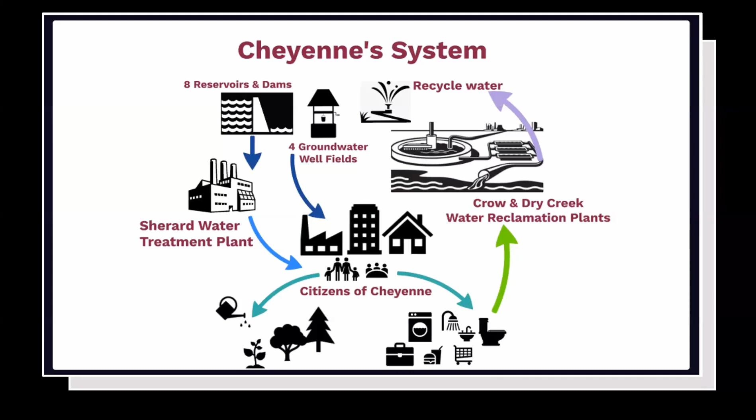Our goal is to grow that system more, and I'll get into that a little more, but that's just a quick overview of how our system works.

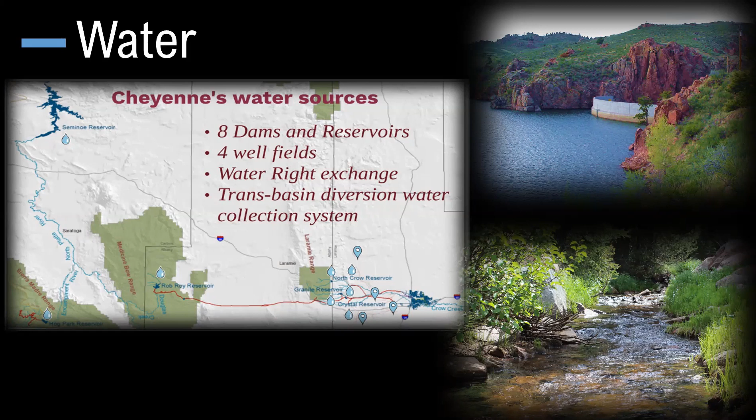Next slide, please. This starts out with our water. Like I said, we have 8 dams and reservoirs, 4 well fields, and water right exchange, and the video I'm going to show will explain all these, so I'm not going to go into detail. We have the only trans-basin diversion water collection system in the state of Wyoming. We actually bring water over from the western side of the divide as transfer water that enables us to collect that water in Rob Roy and bring it to Cheyenne. We have a video that we're going to show that'll explain that carefully.

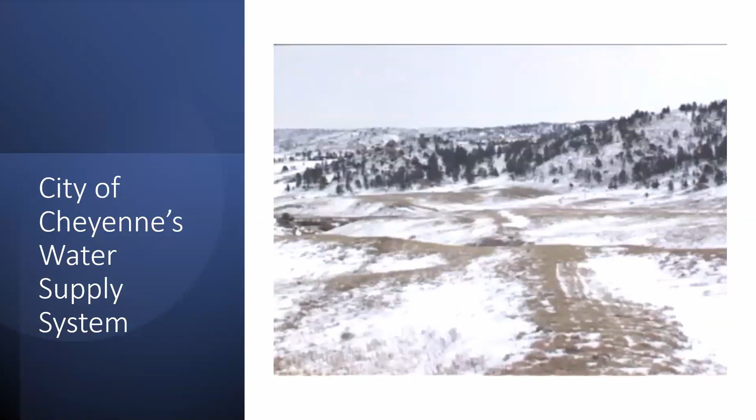The city of Cheyenne is home to more than 60,000 people. It is a city of commerce, full of life, art, education, and activities. When we look beyond our city borders, we see Cheyenne is located in a high-altitude prairie, an area sandwiched between the Rocky Mountains and the Great Plains. We have wind, rolling hills, prairie, and sun. But one thing you won't see a lot of is water. Cheyenne receives only about 15 inches of precipitation per year. So where does the water come from that keeps Cheyenne green and growing?

The City of Cheyenne Board of Public Utilities provides the community with water, and there are many stages the water goes through before it reaches homes and businesses. Our water system begins with snowfall, which is our main source of water. When the snow melts, spring runoff is guided through a series of collection systems, reservoirs, and wells located in southeastern Wyoming. Water is piped to Cheyenne from as far as 63 miles away.

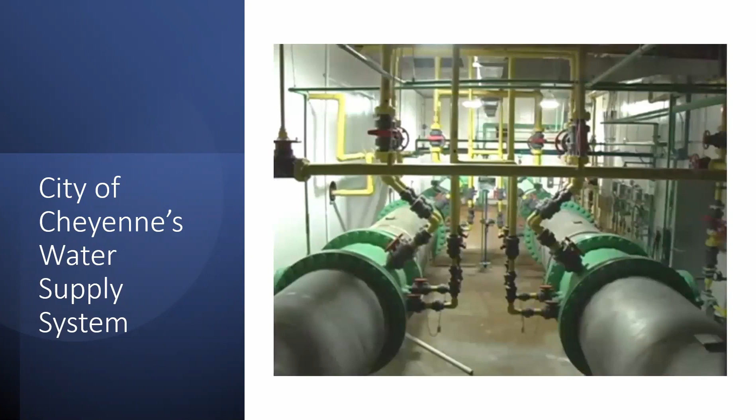Cheyenne's first water system began from buckets of water pulled from Crow Creek and over the years has grown into an elaborate collection and exchange system. In the winter of 1867, the Union Pacific Railroad camped along Crow Creek. Crow Creek provided water for the railroad crews and became the first water source for the city of Cheyenne. At this time, flow in Crow Creek was seasonal, with flooding in the spring and trickles of water in the fall. In order to provide a more consistent water source, the city of Cheyenne constructed small reservoirs and infiltration galleries. The remnants of one of these reservoirs can still be seen near the Botanic Gardens.

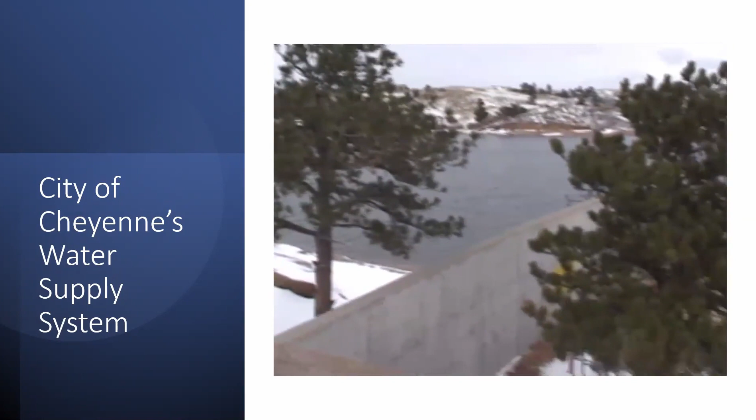One of Cheyenne's first reservoirs was constructed in 1904. The appropriately named Granite Springs Dam is a masonry arch constructed with granite blocks pulled from the surrounding area. The reservoir is still in use today and collects water from Middle Crow Creek. It can hold 5,320 acre-feet of water.

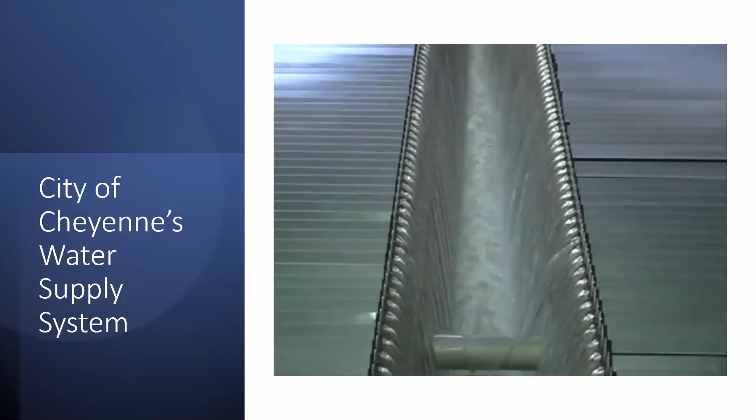Following the construction of Granite Springs Reservoir, the city of Cheyenne constructed Crystal Reservoir. Work began in 1909. Crystal Reservoir also collects water from Middle Crow Creek and can hold 3,400 acre-feet of water. Water from both Granite Springs and Crystal Reservoirs is piped to the Sherard Water Treatment Plant, where it is prepared for delivery to homes and businesses. Diversion structures on the creek water systems divert water released from the reservoirs to other locations so it can be piped onto Cheyenne.

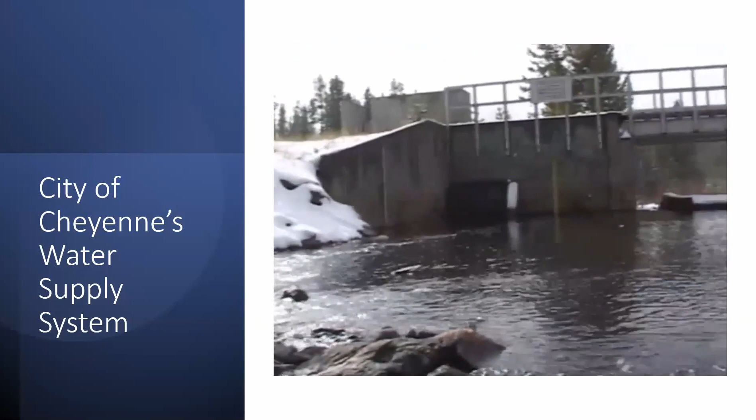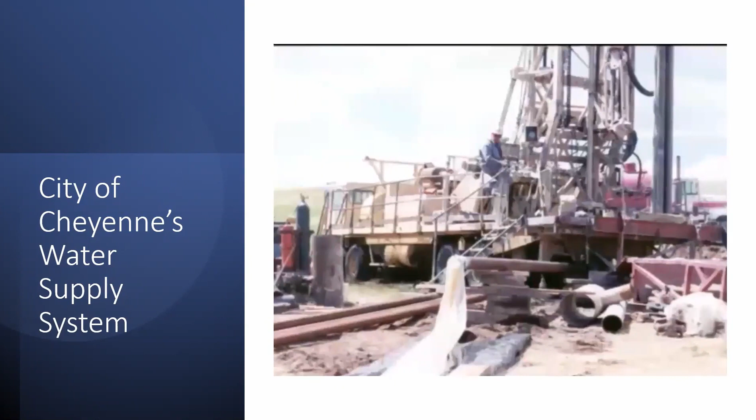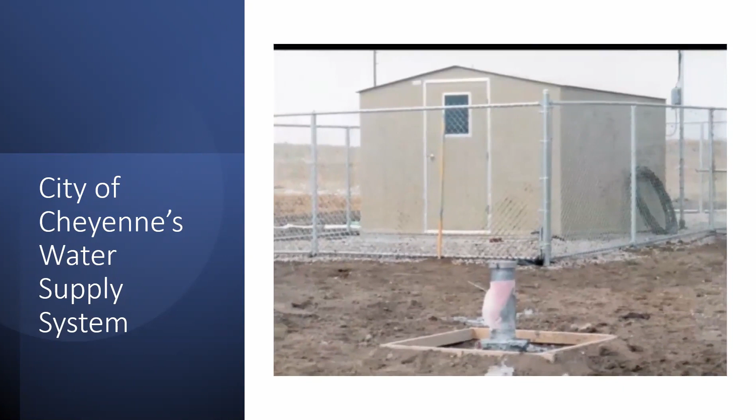Approximately 30% of the water used in Cheyenne comes from wells. The Board of Public Utilities maintains 4 well fields to the west and northwest of Cheyenne. These well fields consist of 35 active wells that go between 200 and 500 feet deep. They tap into the Ogallala and White River aquifers. Cheyenne has a right to 5,500 acre-feet of groundwater per year. The City of Cheyenne established the Board of Public Utilities to manage water resources on April 27, 1943.

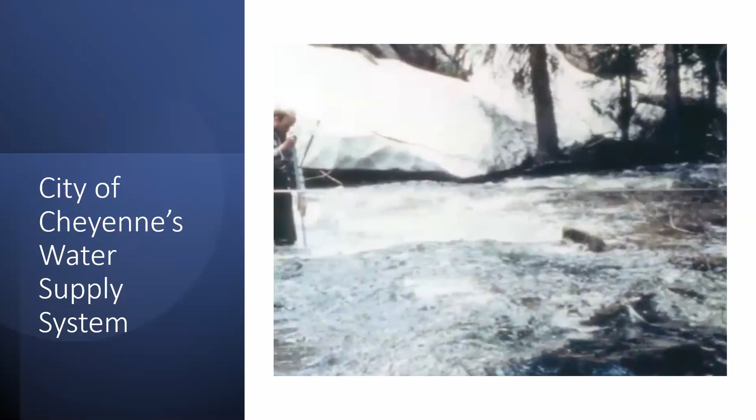Their mission is to develop, manage, operate, and maintain Cheyenne's water and wastewater resources prudently and professionally to provide the greatest benefit for the community's investment.

In the 1950s, Cheyenne's growth began to outpace the capabilities of local water resources. Since the North Platte River watershed was fully appropriated, meaning there wasn't any water available or unclaimed by other users, the Board of Public Utilities looked farther west for additional sources of water.

They found unappropriated water in the Little Snake River drainage, west of the Continental Divide in the Sierra Madre Mountains. The City of Cheyenne has the right to use this water. However, the presence of several mountain ranges make delivering the water to Cheyenne too costly. So how does Cheyenne benefit from this water when it is so far away?

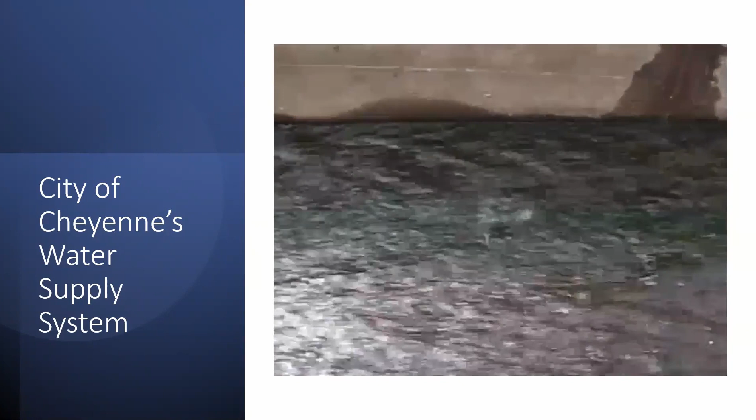Coordinating with the Wyoming State Engineer, an exchange arrangement was developed and approved whereby the Board of Public Utilities can take water from a closer, more deliverable source, Douglas Creek. To make the swap work, the Board of Public Utilities collects water from the western slope of the Sierra Madre Mountains and transports that water under the Continental Divide through a tunnel to Hog Park Reservoir.

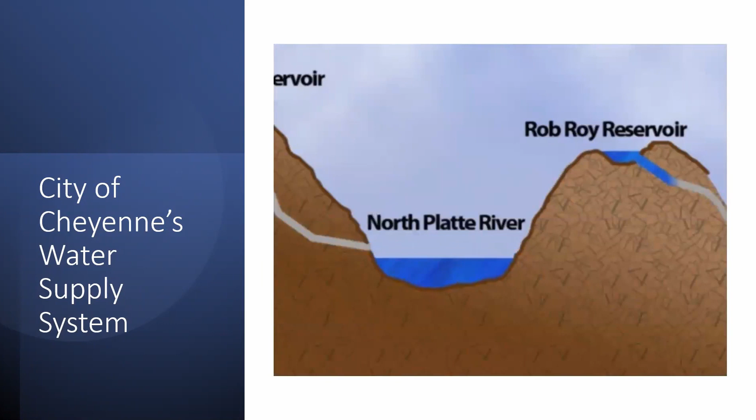Cheyenne uses the water stored in Hog Park Reservoir as trade water. When the Board of Public Utilities takes water out of the North Platte River system at Rob Roy Reservoir, they replace it with water from Hog Park Reservoir.

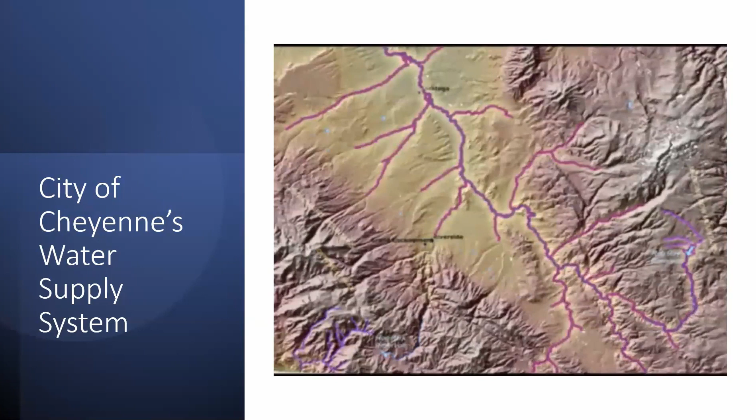Under ideal conditions, the Board of Public Utilities would take water out of the North Platte River system at Rob Roy Reservoir at exactly the same rate that it puts water into the North Platte River system from Hog Park Reservoir. This is seldom possible because the maximum amount of water that can flow down Hog Park Creek is limited for safety, erosion, and aquatic habitat reasons.

So during the spring runoff, the Board of Public Utilities is unable to release enough water from Hog Park to match the high flow rates in Douglas Creek. This limits the amount of water that Cheyenne can collect.

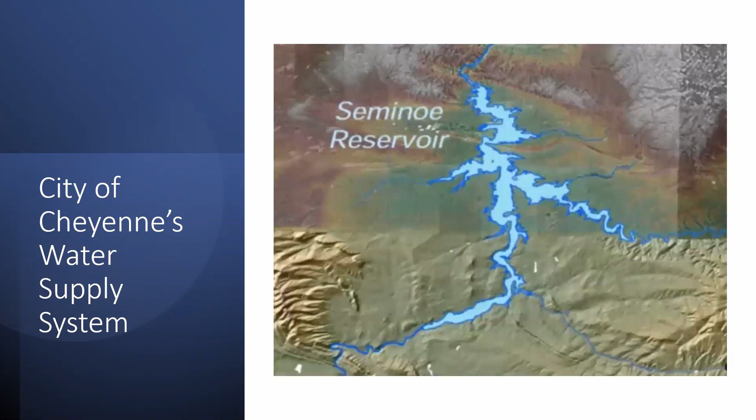To overcome this limitation, the Board of Public Utilities contracts with the Bureau of Reclamation to store water in Seminoe Reservoir throughout the year. During spring runoff, releases from Seminoe and Hog Park match the high flow rates in Douglas Creek.

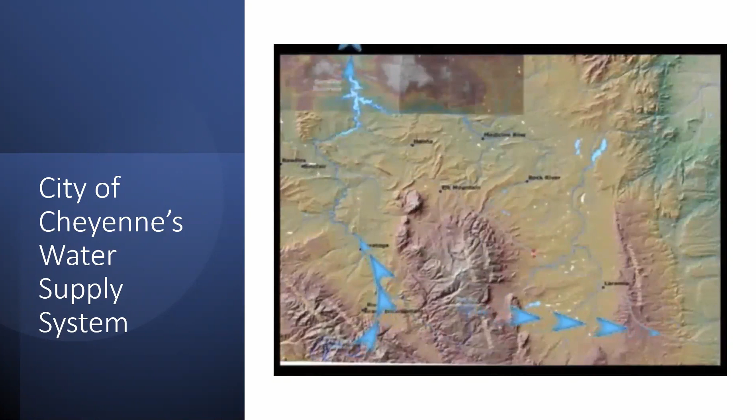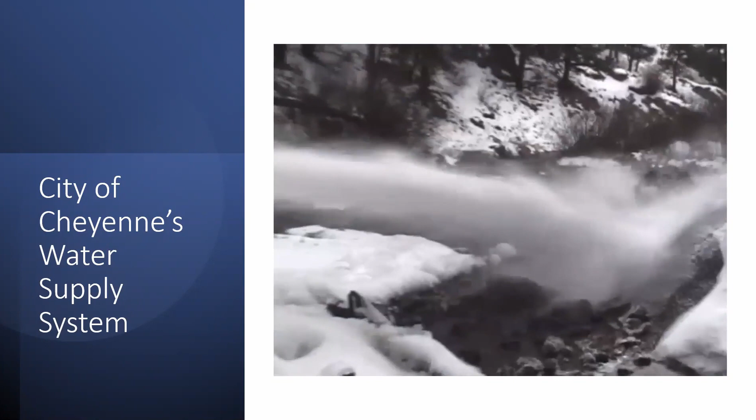The Little Snake Douglas Creek system relies on timed releases and the cooperation of several organizations. When runoff is available, the system yields approximately 17,500 acre-feet of water per year. This water is delivered via gravity-fed pipeline to Granite and Crystal reservoirs, and then on to Cheyenne.

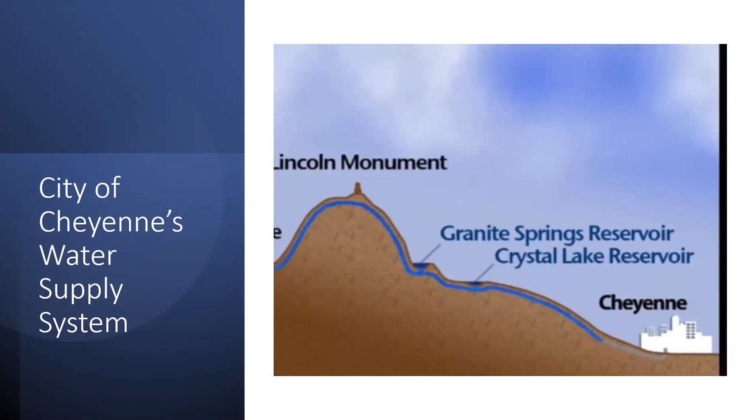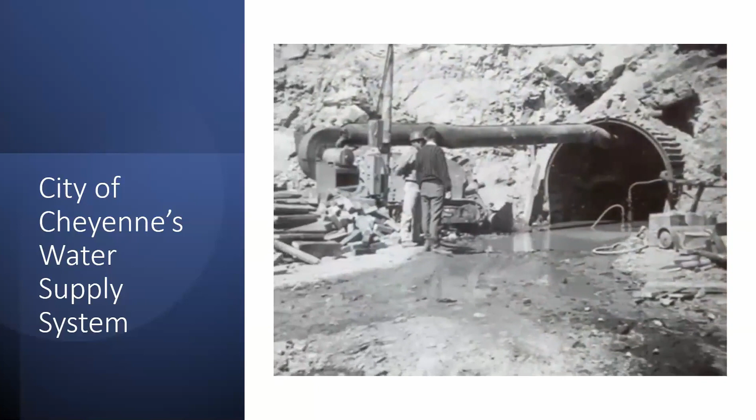Much of the Little Snake Douglas Creek system was constructed in 2 efforts, termed Stage 1 and Stage 2 projects. The Board of Public Utilities constructed the Stage 1 projects from 1962 through 1966. Stage 1 consisted of 5 miles of collection pipes and structures in the Little Snake Drainage, the Hog Park Tunnel, Hog Park Reservoir, Rob Roy Reservoir, Lake Owen, and 50 miles of 26-inch pipe.

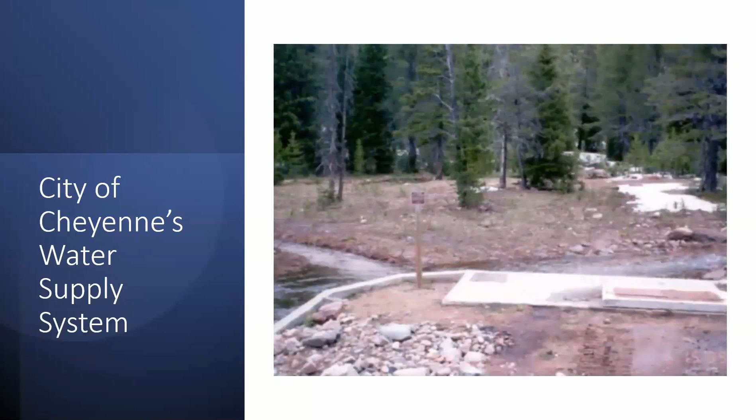Stage 2 was constructed during the 1980s and extended the Little Snake Drainage collection system by 12 miles, enlarged Hog Park and Rob Roy reservoirs, and added 63 miles of 30-inch delivery pipe from Rob Roy to Granite Reservoir.

Both the Crow Creek and Little Snake Douglas Creek systems are heavily dependent on snowmelt for water. Without snow, there isn't any water to fill the reservoirs or to pipe to Cheyenne.

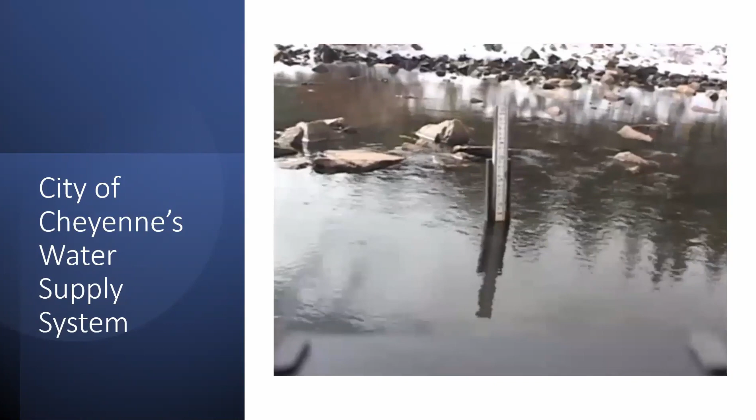In 2002, water users in Cheyenne consumed 18,000 acre-feet of water, while reservoirs only collected 3,450 acre-feet of water. Within the space of a year, Cheyenne's reservoirs dropped to 44.5% of capacity.

While Cheyenne has excellent water resources, these resources are impacted by drought and overuse. When you turn on that sprinkler or faucet, remember where our water comes from and use only what you need.

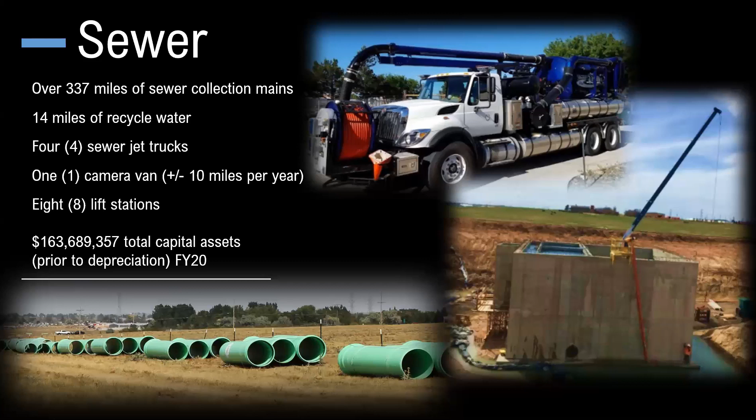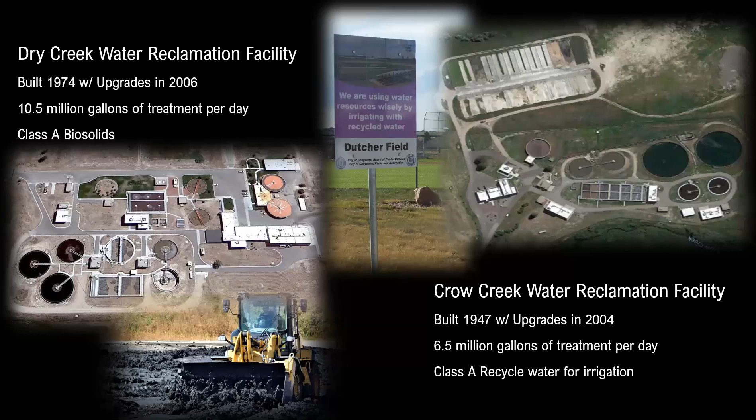I thought I'd go over some of the funding mechanisms we look at as a board. There are a few more I'll add, but basically we have three types we look at. You can look at the local level, where we pay as we go using user rates and added fees. That's typically the board money, and we do a lot with what we get in rates, and we can actually finance a lot of those projects.

We charge system development fees on every new tap that comes into our city. That's a one-time fee that's kind of their buy-in for all this infrastructure they're taking access of. Every lot in town has paid it. We can use those fees, but only for projects that have to do with enlargement of our system—maybe a new transmission main, enlargement of the water treatment plant or water reclamation plant, or more storage. Those are the only things those fees can be used for. They can't be used for rehabs or everyday maintenance and operation of our facilities.

Then we also have tap fees—those are paid every time somebody taps our mains. We do have cash reserves, debt and loans, and another option is municipal bonds.

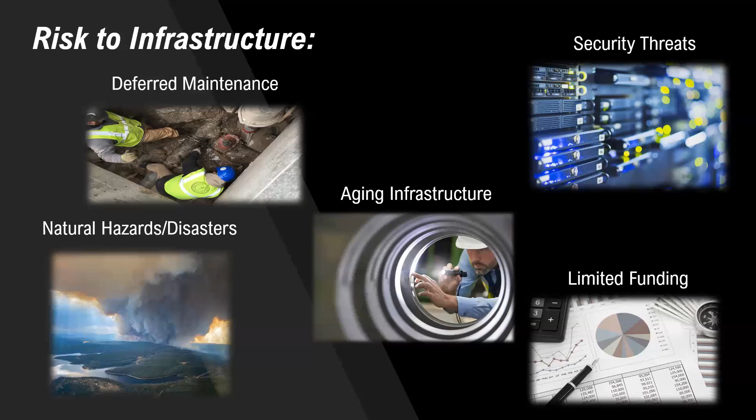Okay, next, regulations. Just some things on regulatory matters that we always have to be aware of. I'm not going to go into major detail, but federal land designations and some of the requirements that come along with that. We have facilities on federal lands, and with that there are a lot of additional conditions we have to meet.

For example, we have a pretty elaborate permit that allows us to operate our water system over in the Hog Park, Rob Roy area, which we have to maintain every year working with the U.S. Forest Service. There are also water rights, compacts, decrees, and senior versus junior water rights.

We're going to talk about that a little later. Some of that pertains to our water rights, and some of the stuff going on in the Colorado River. There's always competition for scarce land and water. We actually have a consultant on board right now, a water rights attorney, helping us in Cheyenne look for the possibility of obtaining additional water rights, whether here in the Crow Creek drainage or over in the North Platte drainage, to help us in case we have a curtailment and need to make up some water.

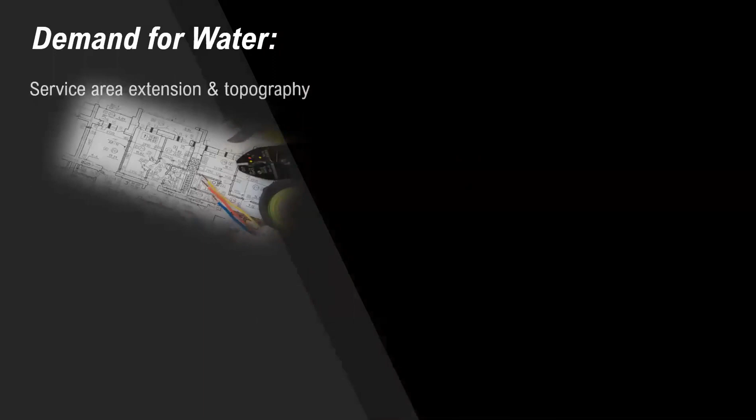Demand for water - these are just some things we are always monitoring and looking at. As everybody's aware, it's an exciting time to be in Cheyenne. I regularly have discussions with our staff, who have discussions with other organizations in town, whether that be the mayor's office, the city, or Cheyenne Leads. Many people are looking at coming to Cheyenne - there's a lot of opportunity and business opportunities here. So we're always looking at and considering increases and extensions to our service area and the topography here.

Because of our elevation changes or the topography of where they want to build, what implications will those have on what's needed to put in infrastructure to serve those new residences or businesses.

Again, the population and economic growth - if all that happens that we hear is going to happen here in the next few years, I think there's going to be a lot of population and economic growth here in Cheyenne. Our desire is always to be very proactive at the board and try to stay ahead of that growth so that we're ready to serve when called upon.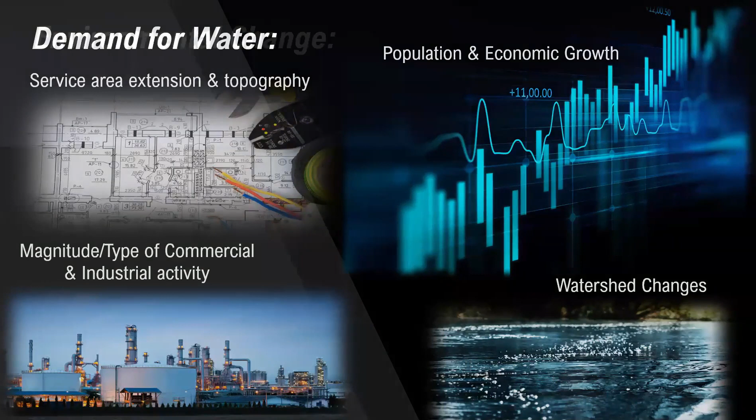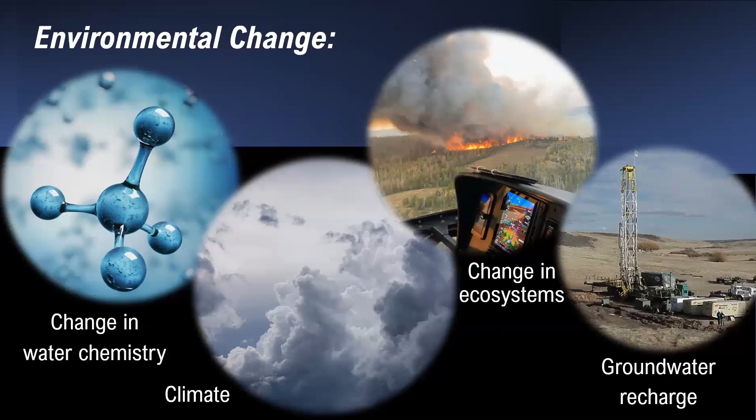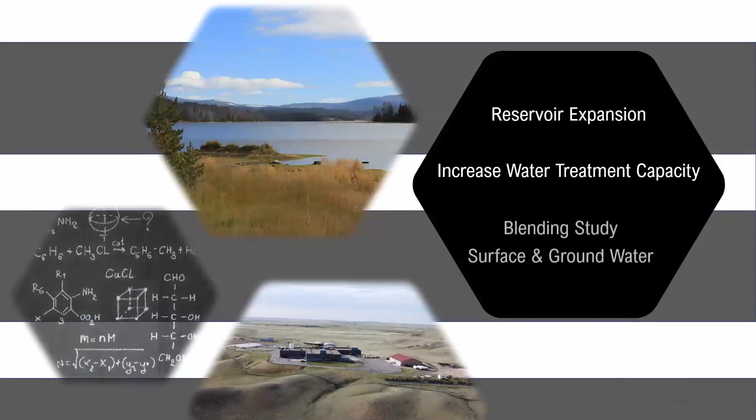So solutions—we've got all these things we're dealing with. We just thought we'd share some of the things we're doing to be proactive and stay ahead of these. Back two years ago, through the Water Development Commission, we did a reservoir expansion study. That study looked at the possibility at the time that we might enlarge Crystal and Granite reservoirs out west of town, or look for other places to develop additional reservoir storage, since we have additional water rights we could bring over. Out of that plan, it came up with some conclusions—right away, storage is probably not our major need. Before we'd want to do a storage project, there was some more low-hanging fruit.

Some of those items are: we determined that our raw water that comes off of our North Crow Creek system, we needed the ability to get that to our Sherard plant. Typically right now we use that as raw water and bring it into town, and that's what serves our parks up at Lions Park. We actually have a raw water irrigation system that feeds the golf courses, the base, the country club over there, and the parks.

With the impacts of needing good potable water in the future, we wanted to have the ability to bring that North Crow water to the Sherard water treatment plant and treat it for drinking water instead of raw water. In the future, we will more than likely extend our recycled water system up into that area, so we can free up that raw water to be used for potable uses. That's one project we're in the process of doing.

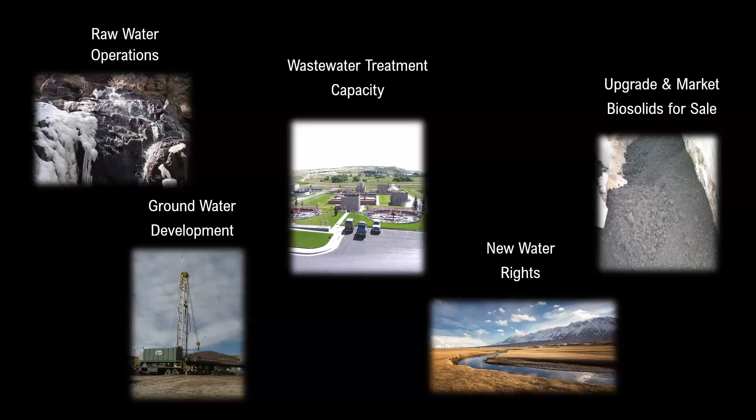There's some other storage options on the North Platte that we're researching, and so that's just something that's continual. But we did hire somebody this last year to help us out with that, specifically looking at what possibilities may come down from curtailment on the Colorado River.